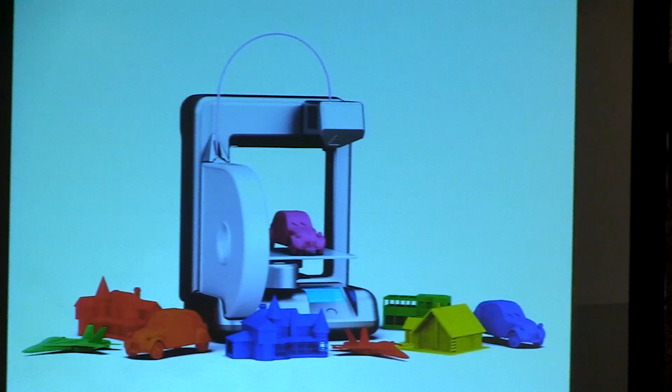And I think the pace of innovation, while it has sped up considerably in the last 5 years, is going to continue to increase at an exponential rate, and we will see more dramatic improvements over the next 5 years than we've seen in the last 5 years.

One of the places where I really do think consumer 3D printing is interesting is in schools. So one of the places where I think it's made a tremendous difference is in schools, particularly as schools have tried to revamp their education. I'm fond of saying that certainly in the American school system, it often seems to me that we're educating our children for a future that no longer exists.

It's an education system based on the idea that we're going to take an agrarian population and move it into factories. That is not the world of our future. That's not the world of our children. The world of our children needs to be one that's filled with wonder and excitement and taps into their creativity and imagination. And I think the placement of 3D printers in schools has really helped with an equal emphasis in the curriculum on science and technology and engineering and math.

One of the things that we've done that I'm most proud of, in the last year Autodesk made a decision, just because of those things, is that we've decided to give all of our professional software, any piece of software we make, free to any student, to any school, or any teacher anywhere in the world.

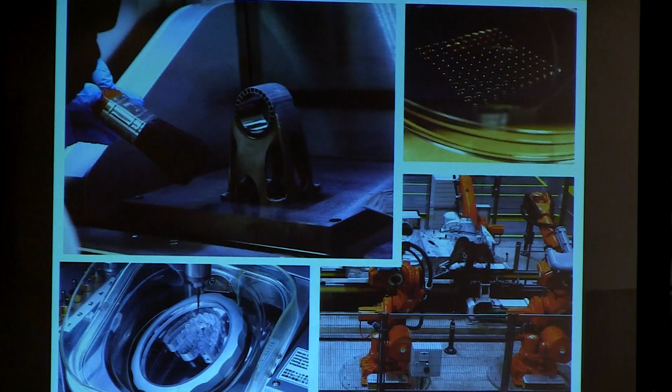But the thing where I think the most commercial promise in 3D printing is, is in industrial additive manufacturing. And so let me talk a little bit about industrial manufacturing and why I think it has such a great potential to change the world. The first one is that shape complexity is free with 3D printing.

Here's an example. This is a bowl I designed maybe 3-4 years ago, something like that. What was interesting to me was I actually tried to make it. I had 3D printed it first out of plastic, but I didn't want the final product to be plastic. I wanted it out of different materials. And in particular, I tried to make it out of metal.

I tried at least 5 different techniques: casting and water jetting, just casting, wire EDM. I tried milling it, almost everything, and it was not possible. It was too complicated a shape for each one of the techniques for a different reason. But here's something where you could go right from CAD to a finished thing. This was printed in metal. It was printed in stainless and bronze, and came out perfectly.

And I love this idea that my 3D printer couldn't care less whether I'm just printing a big block, a big cube, or something incredibly complex. And I think that's one of the reasons why we're all willing to put up with the shortcomings of what we see in 3D printing, is that fact.

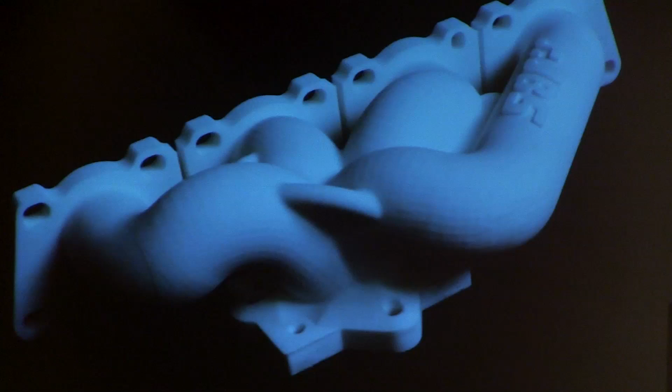So I think this combination of shape complexity coming for free, plus the idea that little craftsmanship is needed, is what has captured people's imagination. So if we go back in time, the first 3D printer I saw was probably 25 plus years ago. Back when everybody labeled the industry rapid prototyping, that to this point is still what I see as the greatest use of 3D printing. The most widespread use I see amongst our industrial customers is still as a rapid prototyping tool. And it's incredibly useful.

As realistic as the images have gotten on the screen, as realistic as the models are, there's something different about putting it in your hand, about having a tangible object that you can put in your hand and fit to other objects and see what it looks like and roll it around and kind of feel the surface. There's just something different about it. And when we put it in place, it's great. But what's going to make these things that today are mostly prototypes into objects that we can use more completely?

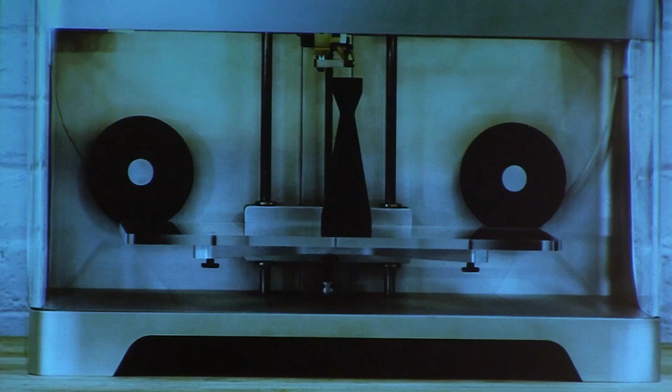So here's a great new printer. This is the latest in my collection. This is the Markforged printer. And what I think is really exciting about it is the quality of the materials that are coming out of it. So it's a printer that will print plastic, but reinforced with strands of either Kevlar or carbon fiber. And the parts that come out of it are much stronger.

I think the team from Markforged is actually here. They may even be speaking. If not, I think they're upstairs. And you can see the parts.

One of my colleagues, who is way braver than I am, when climbing this weekend in Tahoe, designed and printed that carabiner on the printer. It's plastic and Kevlar. So I would have thought it was bullet resistant or bulletproof. I'm not sure I would have actually hung myself from that. But he actually went climbing with that carabiner. So really interesting that all of a sudden we're starting to have things that are really not just prototypes, they're not just intermediate artifacts.

They're the real thing that can actually do the job. One of the places where I think we're going to see the most of this is in places like industrial tooling and fixtures. This is just an example.

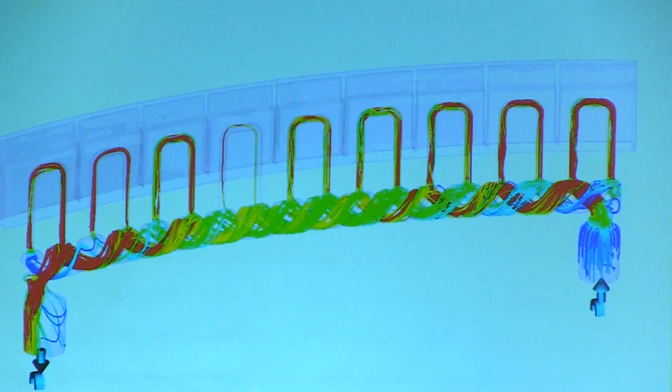We do a lot of work with companies who do injection molding of plastic parts. And one of the things that limits injection molding, while very cheap, one of the limiting factors is how quickly you can cool it. And so this is just an example of being able to add conformal cooling channels to the molds in order to be able to cool it faster. The faster that you cool it, the more rapidly that you can produce parts.

Okay, one of the other things that's changed is software. I just want to talk a little bit about a new product that we introduced. It was called Fusion 360. And it's the first cloud-based mechanical CAD system out there. Like our other stuff, it is free. We've also made it available to not only the students in universities, but to enthusiasts, people who want to print.

And one of the things that I think is particularly interesting about it is it combines what is traditionally the domain of mechanical modeling, which is prismatic parts, with the world of industrial design with much more organic shapes. The interesting thing about many of those organic shapes is they're fairly difficult to produce in low volume.

And that's really one of the big tricks in my mind about 3D printing, is that if you look back at the Industrial Revolution, what happened in the Industrial Revolution is we got high quality and low cost by making thousands of identical things. What's interesting about 3D printing in the whole new world of digital fabrication is that we're starting to be able to get that same level of quality at the same cost, but in very small numbers.

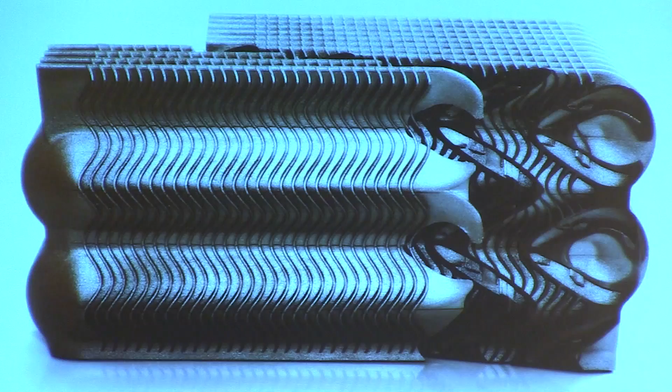This is an example of a heat exchanger. It was designed entirely by the computer. The specification of the requirements, the thermodynamic properties that were needed, were described to the computer, and the computer generated this design. Interestingly, nobody sat there and said, I want that curve that looks like some kind of muted sinusoidal curve. Nobody said this—they described a high-level description of the problem.

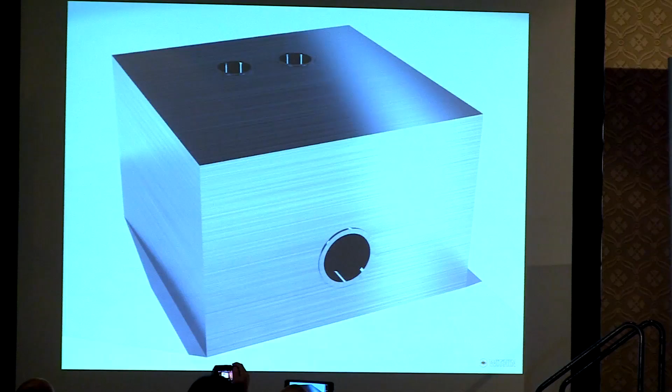Let me show you in a little more detail. This is another heat exchanger that was designed. What you do is basically specify some of the high-level constraints. For example, in this case, it needs to fill a space envelope this big—here's the cube of material you have to work with. Fluid's going to come in one side, fluid has to go out another side. There are some thermodynamic properties we want to meet. The computer explores thousands, tens of thousands, hundreds of thousands of different options.

Here's one of the options along the way. And here's the finished heat exchanger. Again, this is a heat exchanger that was designed entirely by the computer, to some degree—what I mean by that is the specification of it was entirely done by the engineer. What was required to solve the engineering problem was done by the engineer, but the geometry and topology of it was actually created by the computer.

What's interesting to us is we started to see lots of examples where the computer could design a better product—it was lighter, it performed better, and it was stronger. So it met all of the traditional criteria except for one: that thing is very difficult to fabricate using traditional techniques. Over and over, the shapes we were getting were like this. So we started looking at expanding the criteria to include manufacturability, not just the geometry, topology, and other engineering characteristics, but what could you do to make sure it was manufacturable. There's no limitation on that being one of the inputs to the process. So it's interesting that you get what I think is a beautiful heat exchanger, but also one that performs better.

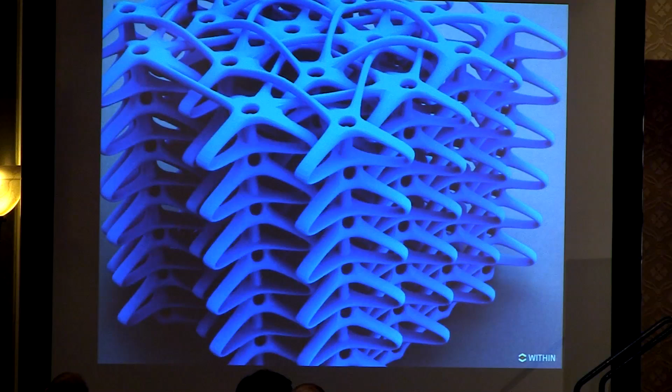Here's another example of some of the forms that are actually generated by the computer in response to different conditions. A typical kind of problem we're working on with these optimization techniques is, for example, let's take a typical engineering problem: you have a bracket, it needs to have a couple of mounting holes, it needs to fill a space envelope, and needs to support certain loads. Rather than doing that rather mundane engineering task, why don't we really start having computer-aided design and let the computer help us design those kinds of brackets?

And so this is another example—we're also doing some work with Airbus. We started to work with Airbus because one of the things that became really interesting to me about additive manufacturing in an industrial context was the idea that at any point in space, at any voxel, I can essentially put any material I want. So rather than taking a technique where you take standard materials off the shelf, we are approaching a world in which we can custom design materials for the specific task at hand.

Rather than just grabbing aircraft-grade aluminum, we can make up materials that are a mixture of the appropriate materials at every point in space. You already see this with printers that do multiple materials, and this is going to continue, where I believe we will have bespoke materials for the thing we want, rather than trying to figure out how we're going to transform stock materials into the object we want.

This was work we did with Airbus, trying to imagine an aircraft of the future. Of course they wanted it more comfortable, lighter, stronger, and more fuel efficient. So this is some of the work we did with algorithmic design to look at the aircraft of the future.

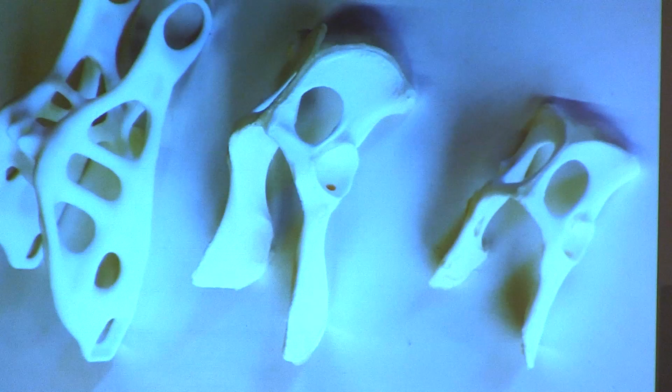What's interesting here is the image on your left is a computer-generated version of the swing arm. The other two things in there - does anyone know what they are? Yeah, it's a cat pelvis. We never asked the computer to design a cat pelvis - what we actually asked it to design was a swing arm. One of the really interesting things is if you look closely on the right side, there's a hole, and on the left side there's less material - so it's a fairly symmetrical swing arm that the computer designed, with the exception of less material on this side.

Any of the engineers in the audience know why? Because a motorcycle has a chain, and all the force is applied on one side, so there's actually asymmetrical loading of the swing arm, whereas the cat has symmetrical loading from an engineering point of view. So anyhow, another interesting design that was computer generated.

Here you can see it actually evolving the design. It started with the big envelope, and you can watch over time - this is sped up considerably, but we're doing lots of iterations per second and testing with a fitness function to see which best solves the problem, and we're evolving to designs that look like that.

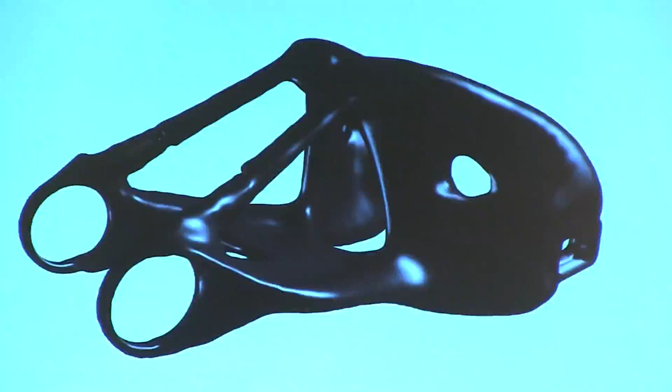Now let me move on and talk a little bit about what Autodesk is actually doing. In some ways, hopefully the generative design gives you some insight into what has made us so interested in this idea of 3D printing. In particular, we see a world in which software, hardware, and materials need to all improve and need to work better together.

Here's another one that's really exciting. This work we're doing is a project called Wire. This is with a company called Voxel8. You can see it upstairs. So this is a combination of printing plastic and conductive material. You can see the placement of some of the electrical components. Okay, so printing plastic and electronics. I think this is the beginning of an era of really much more complete products than ones that are just about the geometry.

This is another great project. I love what this is doing. This is Achim Menges at the University of Stuttgart. He's been using industrial robots to do wet layup of things like carbon fiber. He's been building architectural size structures. There's one of them. So just think about this. Actually building architectural scale structures out of carbon fiber, essentially 3D printing them. So again, novel uses of new technology.

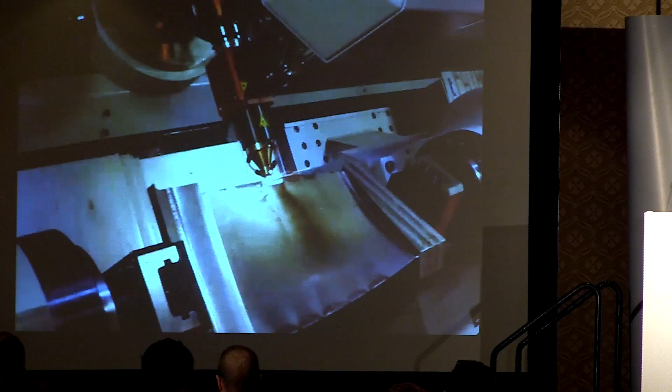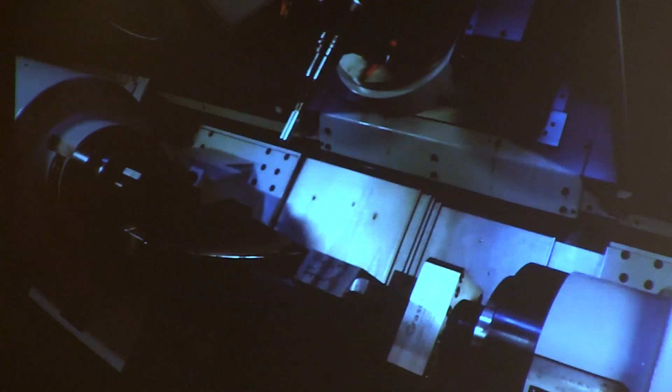Here's one that really has me excited. This is the combination of additive and subtractive. This is some work being done by our Delcam group in the UK. And this is combining the idea of we're going to do additive printing. So we're going to add metal, and then we're going to mill it. What you get is the material efficiency that comes from 3D printing and the precision that comes from subtractive techniques like CNC machining. And then the last thing here, oh, there it is. There's the laying up, and then you'll see the trimming. Let me just move on because we're getting to the end.

This is some work we're doing with an artist in Amsterdam named Joris Laarman, and he's using, again, industrial robots to, some people would say 3D print, others would say MIG weld, but he's laying up metal in space. So he's drawing out curves, and then the machines are printing them. Here's some of the structures that Joris has done.

Here's the final image. This is a project we're working on with him for Amsterdam, in which it is a generatively designed bridge that will be autonomously built by the robots. So, interesting combination of robotic fabrication along with generative design. And that's why I'm excited about the future.